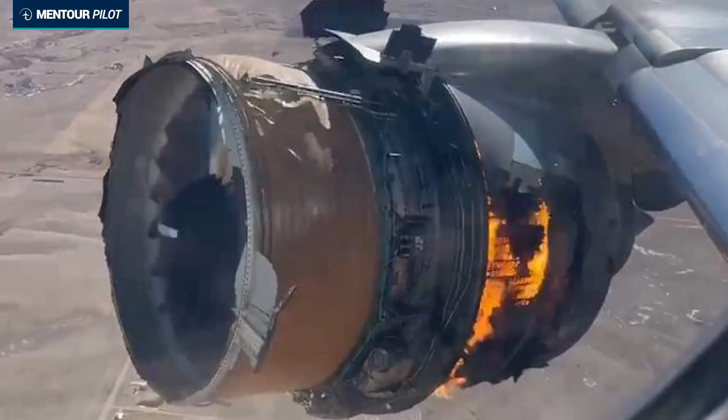Guys, we've all seen the spectacular images from the United Airlines Boeing 777 that experienced this spectacular engine failure outside of Denver last Saturday. So instead of me going in to review the entire sequence, a lot of great YouTube channels have done that already, I'm going to be focusing on the questions that you guys have sent in to me via Twitter, via Facebook, Instagram, and let's just dive straight into it, shall we?

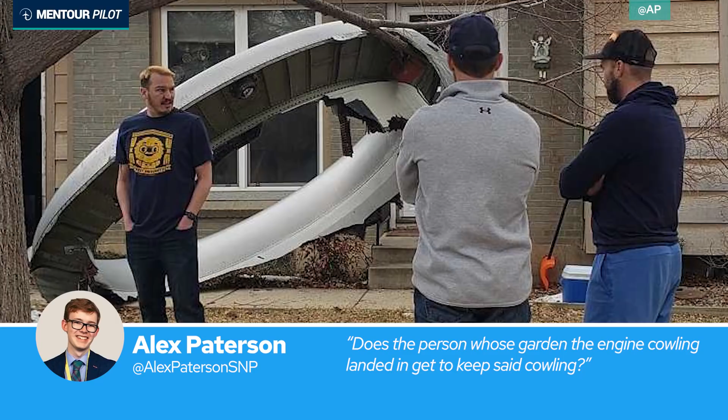Yeah, oh, I love this one. So Alex Paterson is asking on Twitter, does the person whose garden the engine cowling landed in get to keep said cowling? Okay.

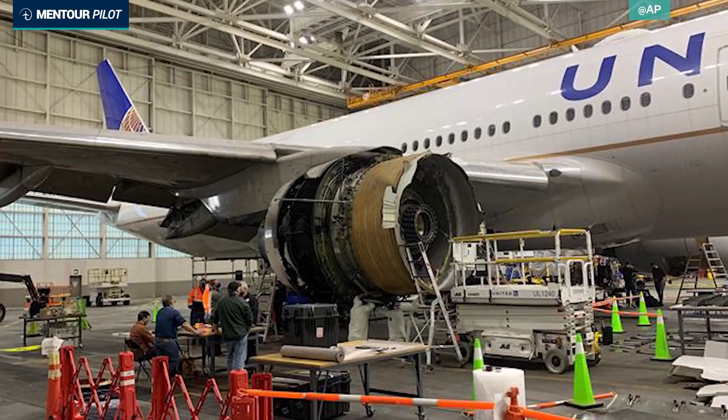I don't pretend to know the legislation in all of the countries that this could potentially happen to. But what you need to really understand here, guys, is that if you are sitting out in your garden and it suddenly starts raining parts of engine and aircraft down on you, first of all, get out of there quickly, right? Take cover. Don't film it, like I've seen people doing on the internet. Secondly, leave it alone and contact law enforcement or your local government, because these parts are going to form a really important part of the ongoing investigation and to try to figure out why this happened in the first place.

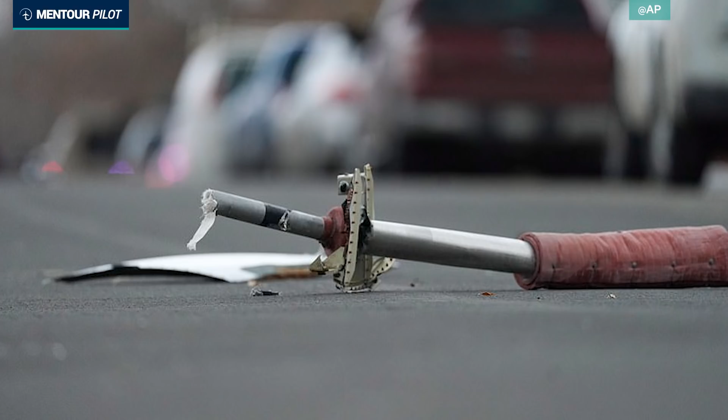So don't touch them, don't move them, just let the local authorities know. They will know what to do. They will probably come out and collect it. So even though you could use them to build the most awesome barbecue in the world or create your own jacuzzi, don't, okay? Let the authorities gather this up. They are going to need to use them, and then who knows, once the investigation is over, maybe you could claim them back. I don't know, it's possible, but don't touch them to start with, okay?

Right, this one is really interesting as well. So Ani Ruda is asking on Twitter, they would have done a pre-flight walk around for sure, haven't they? Yes, and I want to just emphasize here what we try to do when we do a pre-flight walk around, as in both us, the pilots, and the engineers.

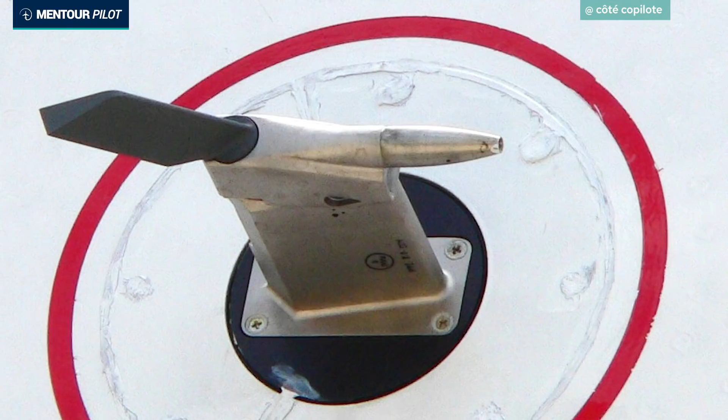Now, what we're looking for when we do the walk around is obvious damage. So bird strikes, for example, that could have caused a dent in a wing or on an engine fan blade. We're looking for leakages. We're listening to how the hydraulic pumps are working. We're looking at all of the static probes and the pitot probes, and that everything basically looks the way it should. But we don't have the possibility to look for fatigue cracks in fan blades, okay? We look for obvious damage.

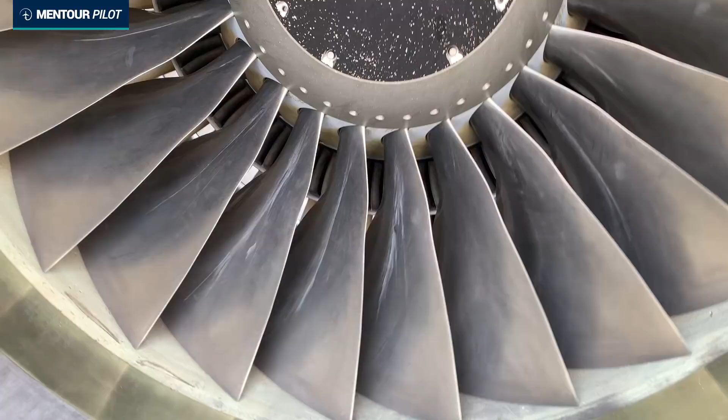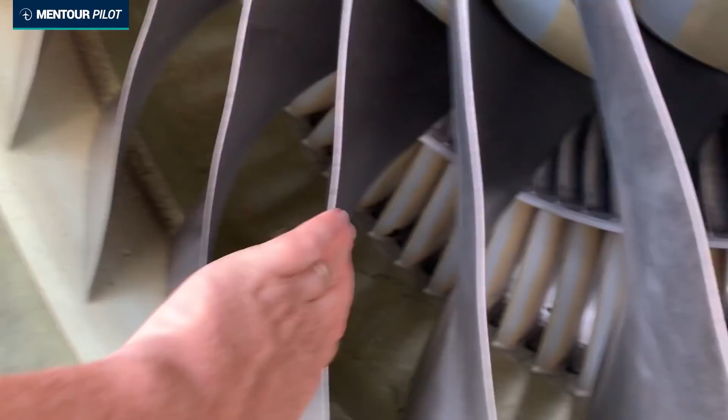So in the case of the 737, I tend to kind of move the fan around just to hear how it's spinning, listen to strange noises and see each fan blade to see if it's been bent by a bird, for example. But a fatigue crack is a microscopic crack. Okay, the only way to find a crack like that is during dedicated, what's called non-destructive inspections, where trained engineers will get each fan blade down, they will paint it with specific paint, and then they will go over it with kind of like an X-ray machine or similar types of machine to try to look down below the surface and look for these cracks, right?

It is impossible to do, even for a trained engineer, when the aircraft is at stand. This is why this is done at very specific, regular intervals in the life of an engine, to make sure that these kind of fatigue cracks don't appear.

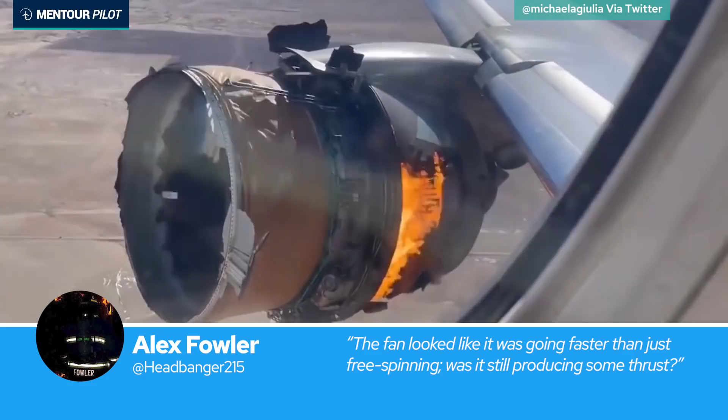So the next question comes from Alex Fowler on Twitter, and it says, the fan looked like it was going faster than just free spinning. Was it still producing some thrust? Okay, great question, by the way.

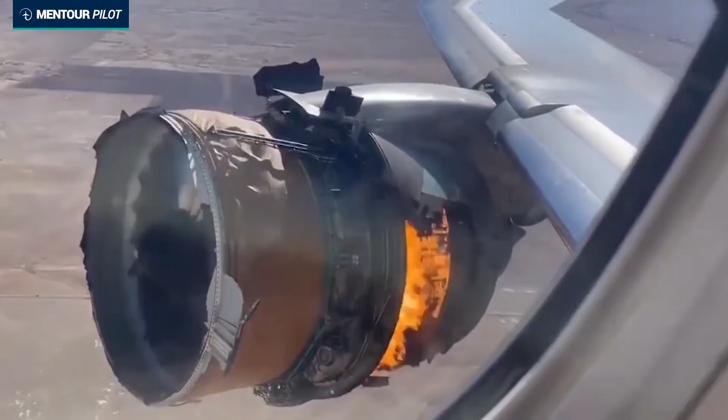So we've probably all seen this fantastic video made by one of the passengers of the engine after the failure. And you can see how the front of the engine is still spinning, albeit with some quite bad imbalance. So the whole engine is kind of shaking. And then you see that there's still flames coming out from the back of it.

Now, that movement of the fan is what we call windmilling. All right, so it looks like it's spinning really, really fast, but that's just because of the speed of the aircraft. When this video was made, you can see that the slats are extended, so it's likely that they are on their way in for landing at that time.

But the speed would still have been maybe around 180 knots or so. And just like your kid's wind spinner, when they blow hard on it, it's going to spin faster. It's the exact same thing happening to this engine.

So the answer is no, this engine was not producing any thrust at this stage. You would not want it to produce any thrust, because if you would accelerate an engine with that much imbalance and that much damage, you could potentially cause even more damage to the aircraft. It might be spitting pieces out.

And also, obviously, at that point, the fuel, hydraulics, everything would have been cut off, because that's one of the first things that you do when you have an engine fire indication, which these guys obviously had.

If you just stay with me, there are more questions coming up again around the fire. I will be talking much more about the fire suppression of the 777 and the fire handle and how it works in just a few minutes.

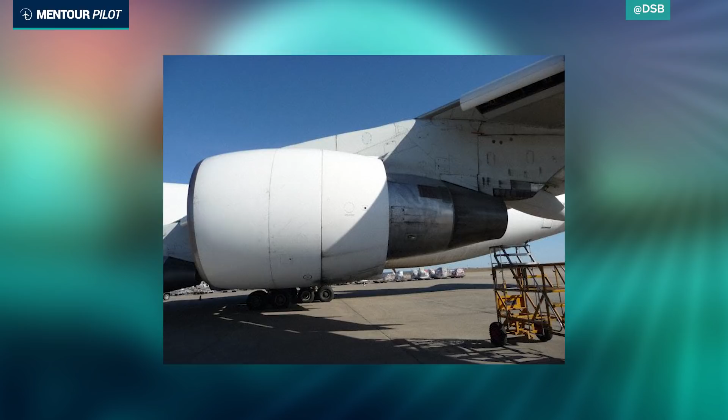On Saturday, there was another engine failure, this time in Maastricht, in Europe, where a Boeing 747 had some type of problem with one of its engines, which was also a Pratt & Whitney 4000 engine. It's essentially the same engine, but there is a major difference. In the Maastricht case, it is a smaller fan, so it doesn't have the same fan blades, so it's a different type of engine, even though it is the same model. But the similarities are striking, as the engine failure also started showering parts of the engine down on some vehicles and houses below, and there was actually at least one person injured on the ground as well.

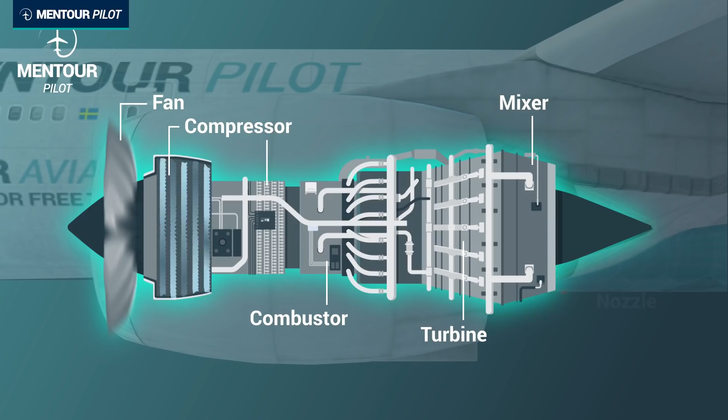But there is a major difference between the two, and that is in the Maastricht accident, there were smaller pieces that fell down, either from the turbine or from the compressor stages. So it wasn't a fan, which means this is a completely different type of failure. Even though it's essentially the same type of engine, still a Pratt & Whitney 4000, this is likely to be something completely different. But there's no question it was a terrible day for Pratt & Whitney on Saturday - two of these engine failures, very similar pieces falling down onto the ground below. It's not good at all.

Right, so this is another great question. It's sent in from SMT on Twitter, and it says, were the engines shut down in response to an engine failure with the fire extinguishers deployed? And was there a risk of the engine detaching itself from the aircraft? Okay, that's actually two questions, but I'll allow it.

Yes, so when we, the pilots, get an indication of an engine failure or fire, we respond slightly differently, okay? A fire is something you need to respond to quickly, same as with severe damage, because you want to make sure the engine is secured down, that the failure does not continue to cause damage to the rest of the aircraft.

So in the case of an engine fire, you need to do, at least in the 737, something called memory items. It's possible that it's slightly different on the Boeing 777. But it includes things like, once the pilot flying has the aircraft under control, the pilot monitoring has identified which engine it is, which by the way is a bit easier with a fire because you have an illuminated fire handle in the cockpit. The thrust will be reduced on the affected engine. The fuel switch, the engine start lever, will be cut off to stop fuel from going into the engine. And then you will pull the fire handle.

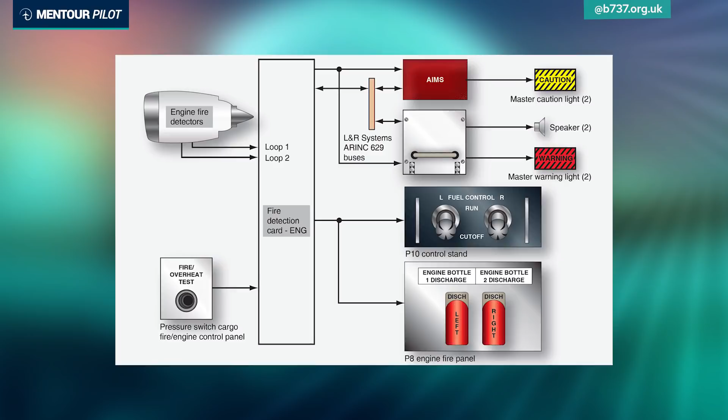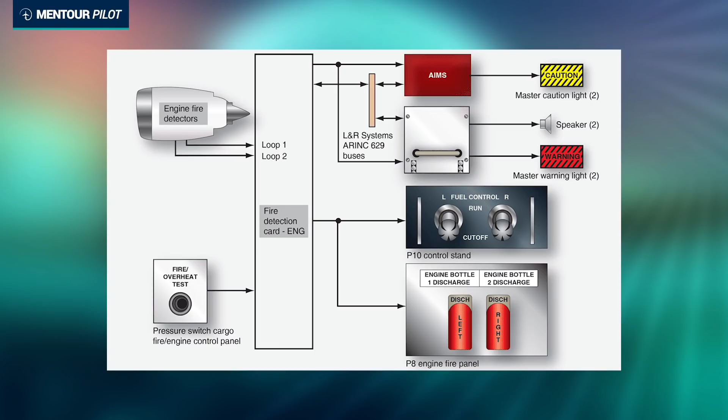It will indicate a fire when two fire loops inside of the engine feel that the temperature goes above a predetermined limit. And when they feel like it's now gone up to a certain temperature, we will get an overheat warning, which is different from a fire. Then if it goes higher, the same system will trigger a fire warning, and that will illuminate the fire handle and give us the fire bell and the master warning and the fire warning as well.

Now, when you pull that handle up, it will isolate the engine. So it will stop the fuel from coming into the engine. It will stop hydraulic fluid from coming into the engine. It will isolate the thrust reverser circuit so that it cannot extend reversers. It will also isolate the electrical circuit, so it will take away the generator, and it will stop bleed air from being taken from the engine. So basically we're now making sure that nothing that can burn can go into the engine, and that we're not taking anything out of the engine that might be faulty.

Then we can turn the fire handle. That's to discharge the fire extinguisher into the engine.

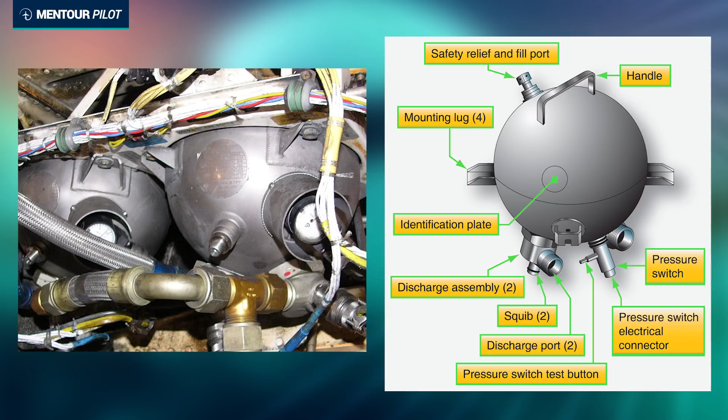Now the fire extinguisher system on the 777 and the 737 is actually quite similar. We have 2 fire extinguishing bottles. Those are filled with halon, and they're pressurized by nitrogen. In the bottom of these fire extinguisher bottles, which are actually round, they look like little footballs, there is what we call a squib and a disc that seals it.

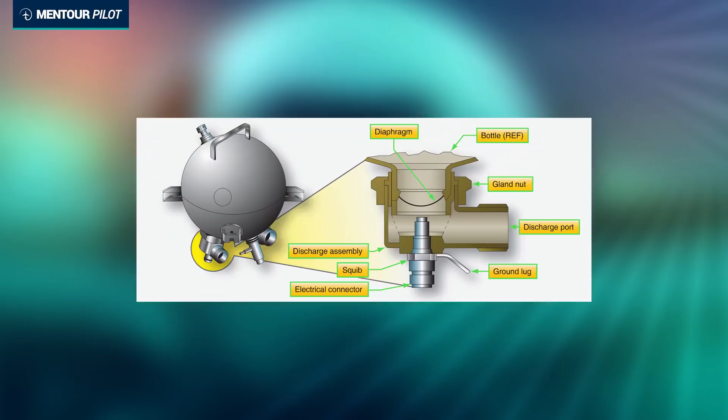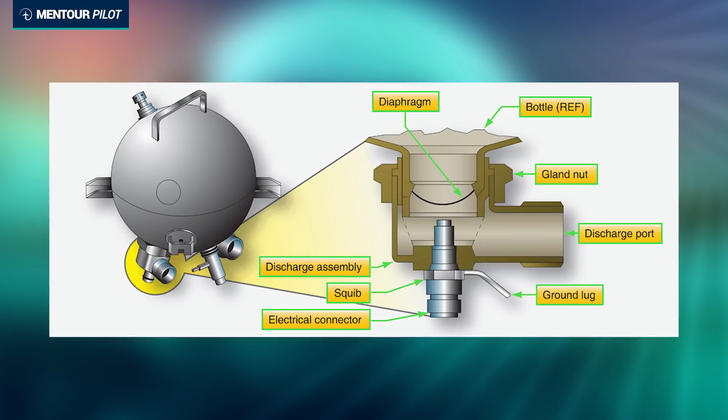When we turn the fire handle, and it's really important that you turn it all the way, you'll feel the click when you actually discharge. That will send an electrical impulse to the squib, which is an electrically activated little explosive device. That will then break the little disc, and because the halon is pressurized, it will then be pushed out into the engine. The way that halon works is that it will remove the oxygen from the engine.

Remember that fire requires 3 parts in order to burn. You need oxygen, you need heat, and you need fuel. So basically we take away the oxygen. In theory, that will remove the fire.

Now, we've seen this video that's gone viral from the United Airlines event. So you know that even though they had done all of these actions, there was still fire in this engine, and the NTSB is now trying to figure out why that happened. Once again, that's why it's so important that any parts that are found on the ground is being given over to authorities, because it is a possibility that there was some damage to, for example, the fuel lines that could have continuously then let fuel into the engine. We don't know. We're going to have to wait until the NTSB has done their full investigation of this.

But in theory, this is the way that the fire extinguishing system works. And you can use both fire extinguishers into one engine, or you can use one for one engine and another one for the other engine. But if you need to do that, you're having a really bad day.

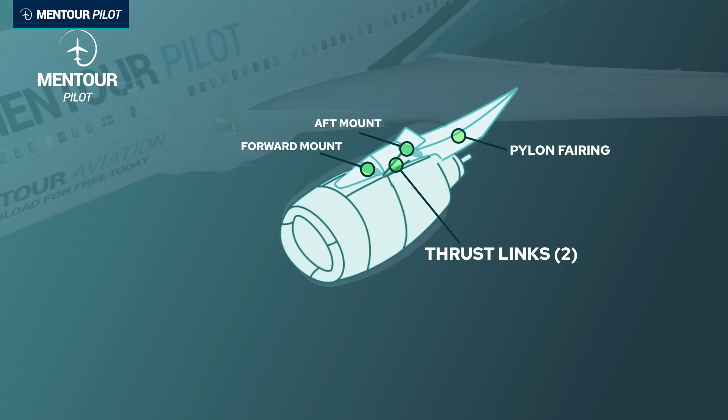So that brings us to the second part of the question, which is, could the engine disattach from the aircraft completely? And I've made a video about how the engines are attached to the wing, which is quite fascinating actually. You can check it out up here. But the answer to that question is most likely no.

Yes, a catastrophic explosion of the engine can rip it off. Yes. But this kind of failure, the way it looks to be a fan blade that has disattached, the engine is actually constructed to be able to take that amount of energy. So it's very unlikely that something like this could ever cause an engine to actually fall off.

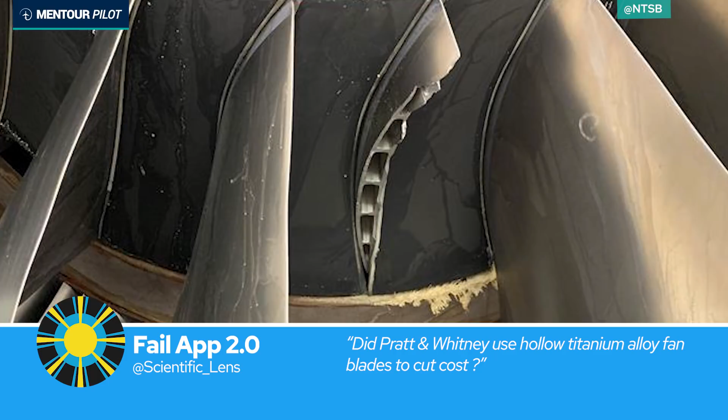Ooh, this is a great one from Fail App 2.0 on Twitter. Did Pratt & Whitney use hollow titanium alloy fan blades to cut costs? Okay, so those of you who have been following this incident would have known that the engines that are involved in this incident is a Pratt & Whitney 4000/112 model engine. These engines was used on a lot of the older Boeing 777s. This aircraft is over 26 years old, and the newer 777s are using the General Electric 90 engines.

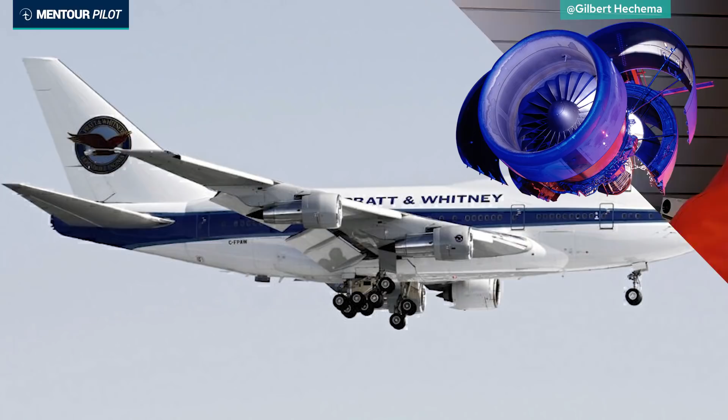Pratt & Whitney, when they constructed this engine, they had already a 4000 model engine. It was used on the Boeing 747, but it had a smaller fan, I think 94 or 96 inches. Now they needed to construct a fan blade that had a diameter of 112 inches. Right? That's a huge fan. And when you start making fan blades bigger, well then they will become heavier as well.

So traditionally, the fan blades were made out of solid titanium. But when you have a fan blade that is that big, using that method would just make it too heavy. And not only would the fan blade and the disc that needs to hold the fan blades become heavier, because they're becoming heavier and because of the speeds that they're spinning with, the heavier fan blade you have, the more energy it will have in case it would rupture.

And you need to have a containment ring that can take those fan blades. So with a heavier fan blade, more energy, a heavier containment ring and a stronger containment ring as well. The containment ring, the one that you can see in these pictures, that's the yellow part of the front part of the engine there, it's made out of woven Kevlar, right?

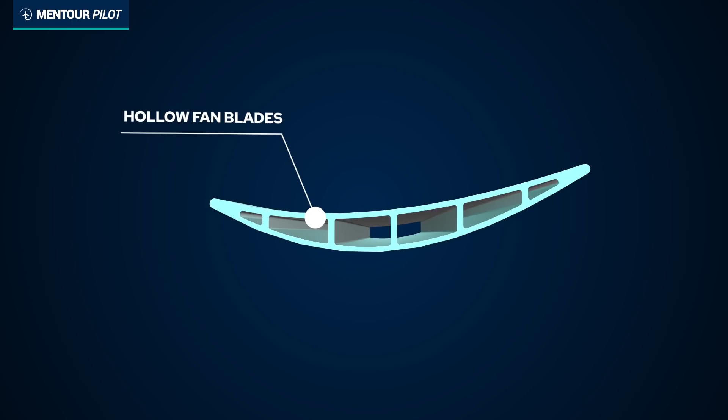It's unlikely that technique would have been usable if the fan blades were much heavier, or they might have had to use double layers, which would have made the whole engine extremely heavy. So they had to come up with a way to create these fan blades reliably, and what they came up with was this monocoque structure, which is basically hollow inside, reducing the weight of the fan blade enormously.

They're not alone in doing this type of fan blade. In fact, Rolls-Royce also have a hollow type fan blade, but they use a completely different manufacturing process. So the answer to your question, did they do it to cut costs? No, they did it because of the physics behind making engines.

What will happen? Well, that we don't know, because this is not the first time these type of engines have had issues. The Pratt & Whitney 4000 engine on the 777 - you would have all noticed that both the FAA and Boeing, and also the Japan Civil Aviation Bureau, and I think latest also the CAA in the UK, have gone out and recommended that all 777s with these particular engines are grounded. The way they're doing this is they say we need to figure out a new inspection process or a new inspection interval for these engines.

But why do they do that before they know what actually caused this failure? Well, that's because of what I said before. Back in 2018, another United Airlines Boeing 777, curiously also flying to Honolulu, experienced a failure to the number 2 engine, the right-hand engine, which was very similar. They were up at 36,000 feet when the crew heard a large bang.

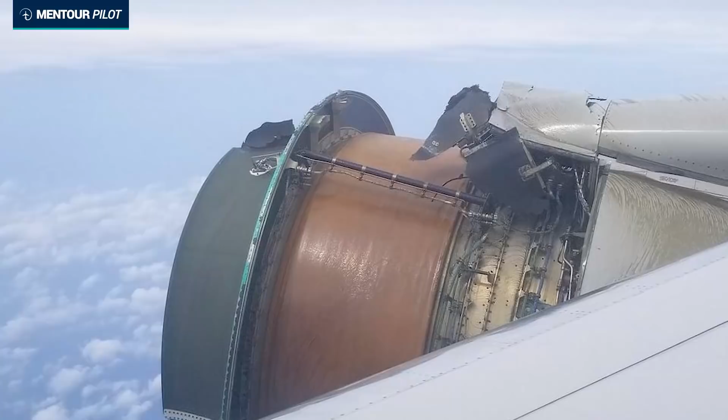In the cockpit on that incident, there was another pilot who was jump seating. He was sent back to take a video to see what they were dealing with, and the video he came back with, subsequently released in the investigation, showed an almost identical failure to what we saw last Saturday. One fan blade had detached from the base of the engine. The next fan blade down had cut in half approximately. The cowling had fallen off down into the sea in this case.

On that occasion, the crew just continued to fly towards Honolulu. They were only about 120 miles away, so they could come in and do a visual approach for runway 08, I think, in Honolulu. Anyway, there was a full investigation into that incident.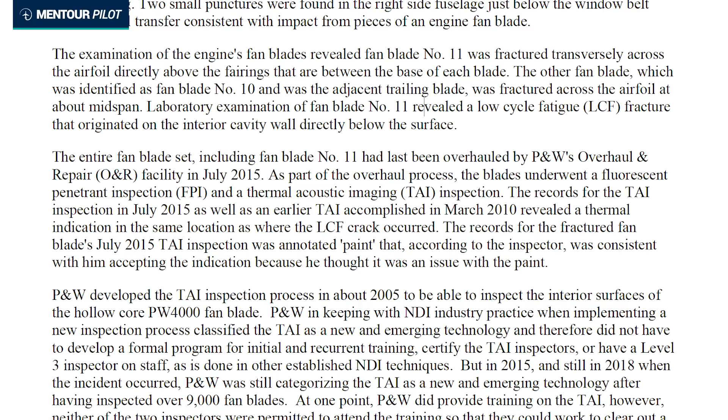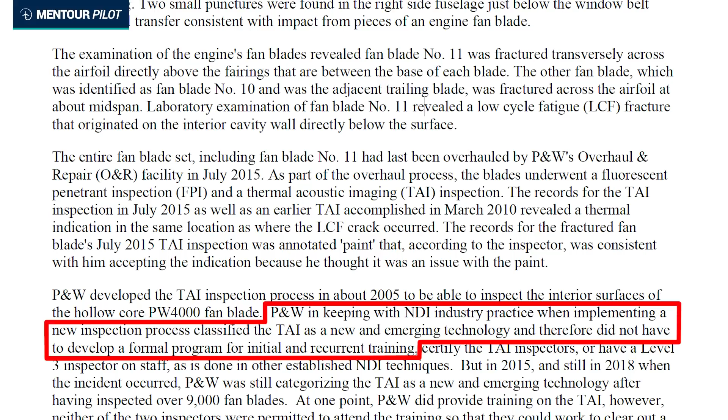In that investigation, the NTSB found that the inspection done on these fan blades - because on fan blades you have to do regular non-destructive inspections and check each fan blade with a special technique - in the case of the Pratt & Whitney, they had a new technique, an emerging technology. And because it was emerging technology, they had gotten a kind of suspension from the amount of training the engineers needed before they were allowed to do these inspections.

It turned out that while a normal inspection is done by an engineer who's done at least 40 hours of classroom schooling, and then 1,600 to 1,900 hours of on-the-job training, these guys doing this inspection only had about 40 hours of instruction on this particular technique. And they had found this indication of a fatigue crack.

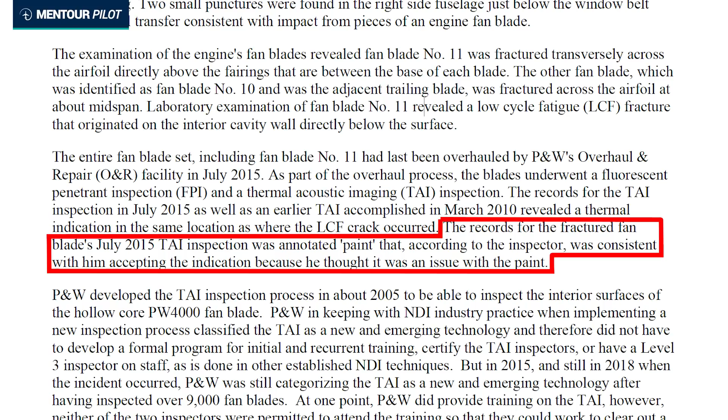There were notes made about this fatigue crack back in 2010 and then again in 2015. But each time, because of the lack of training, these inspectors didn't understand the significance of it. In fact, they thought it was a problem with the paint they were using to do the inspection, so they basically sent it back out - not understanding that what they were actually looking at was a fatigue crack, and that eventually led to this fan blade breaking off. That was a big no-no.

Because of that, these engines were mandated to have an inspection of the fan blades every 6,500 cycles.

A cycle is a takeoff and a landing. But then again, now in December 2020, a Japan Airlines flight, I think flight 904, also had a failure with this particular engine. In this case, it was on the left-hand side, the number 1 engine that failed. And when the crew got down safely on the ground, they also found a fan blade that had broken loose. Now, we don't know if these three incidents are connected, but because of the similarity of them, and because it's the Pratt & Whitney 4000/112 engine involved in each case, the civil aviation authorities are just taking it safe. They're saying, okay, we don't know exactly what's causing this, if this is an inherent problem with these fan blades. Let's put them down on the ground, let's inspect all of them thoroughly, and because of that, the 777s attached to these engines are grounded until these inspections can be made.

Okay, as a final question, this is something I personally want to really emphasize. This is a question from Michael Tavel on Twitter, and it says, what is the effect on grounding the 777 on Boeing? First it started with the MAX, then with COVID, and now 777. Can a company like Boeing survive all those hits? Now, I don't know if Boeing can survive all of those hits regarding, for example, COVID and the MAX.

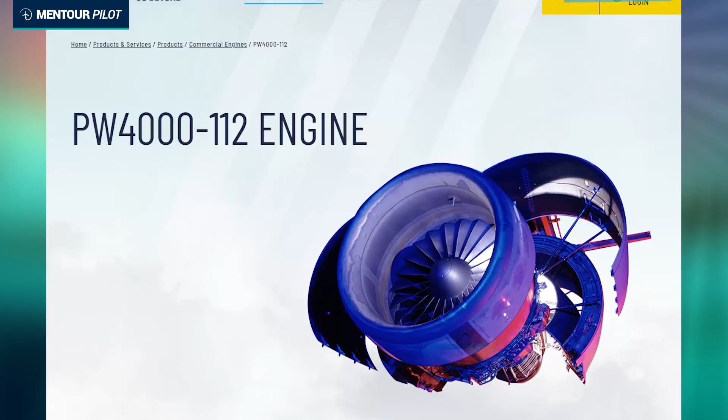But I think Pratt & Whitney, and especially the Pratt & Whitney 4000/112 engine, is going to get a lot of scrutiny because of this. We don't know what caused it yet, so it's still up to the investigation to come up with this, but I did want to really highlight that there shouldn't be any Boeing bashing because of this incident.

This is an engine manufacturer thing.